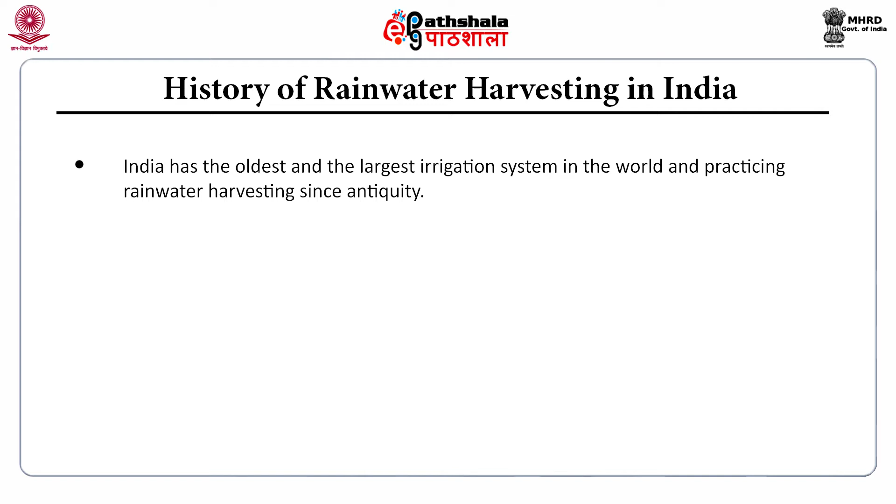Rainwater harvesting is not a new concept. Since antiquity, India has the oldest and largest irrigation system in the world and has a history of practicing rainwater harvesting. The oldest and largest known irrigation and rainwater harvesting system was created by Chola kings in Tamil Nadu.

People of Rajasthan have traditionally been practicing rainwater harvesting since ancient period. The Baoris and Jhalaras, also known as step wells, are the oldest rainwater harvesting systems and are widely used in different parts of Rajasthan, Gujarat, Karnataka, and Maharashtra as well.

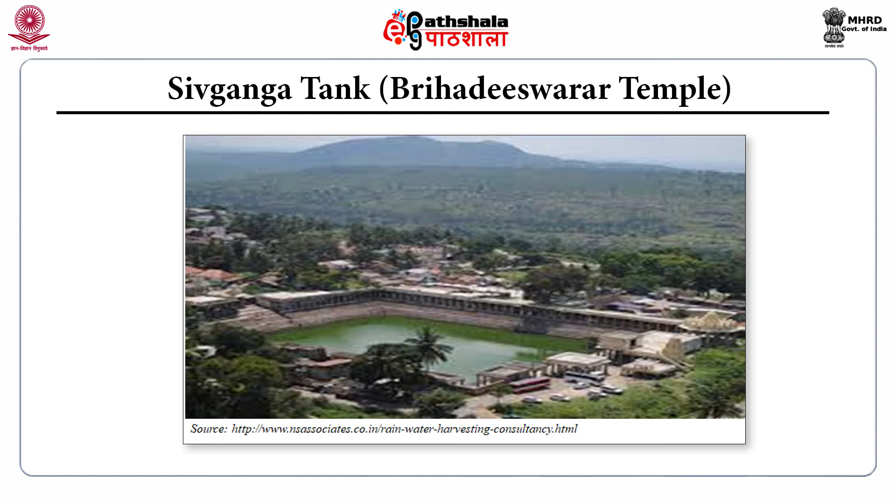In different parts of the country, different techniques are traditionally practiced, such as Sivganga tank or Brihadeeswarar temple tank, which collects rainwater used for the famous temple and also for irrigation activity at Thanjavur.

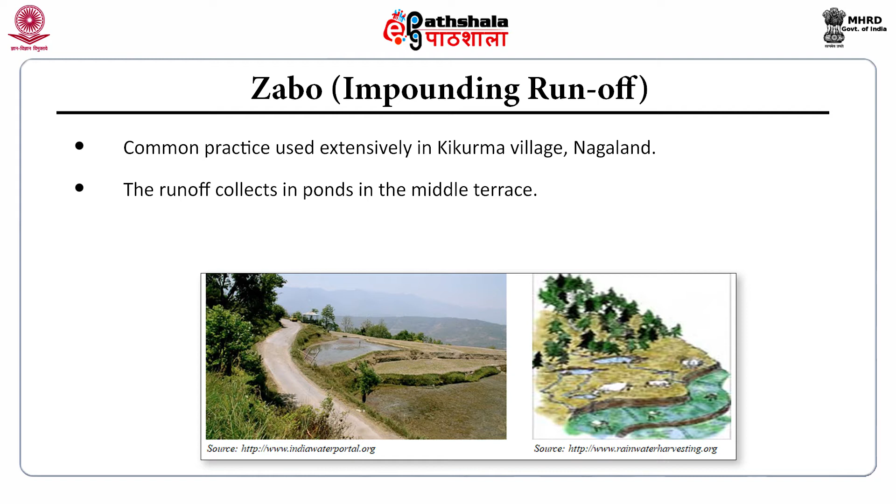The next technique among the traditional practices is Zabo, also known as impounding of rain runoff. It is a common practice used extensively in Kikurma village, Nagaland. The runoff collects in a pond at the middle terrace. This pond, called Zabo, receives rainwater and is used for paddy plantation and also for fish rearing. The bunds on the side of the ponds are used to grow herbs and medicinal plants. This way, the traditional farming system also helps in conserving the forest in the region.

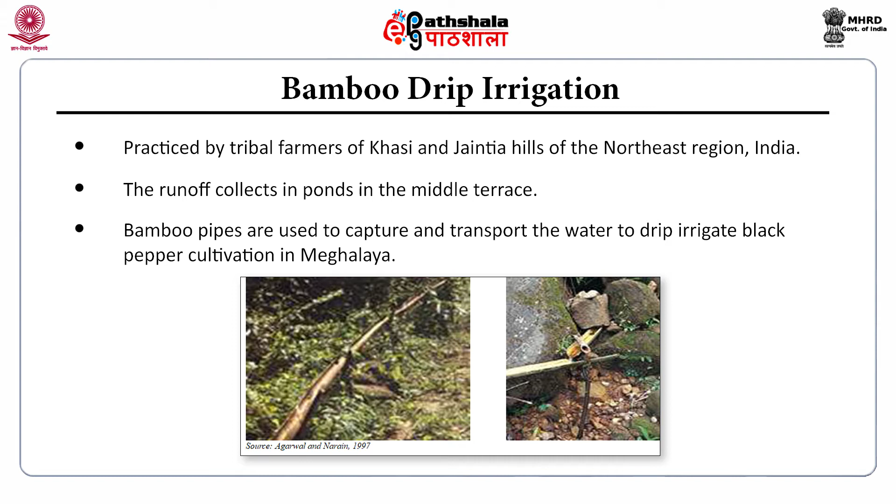Bamboo drip irrigation: bamboo pipes are used to capture and transport water to drip irrigate black pepper cultivation in Meghalaya. Many bamboo pipes of varying diameter and length are laid to manipulate and control the flow of water.

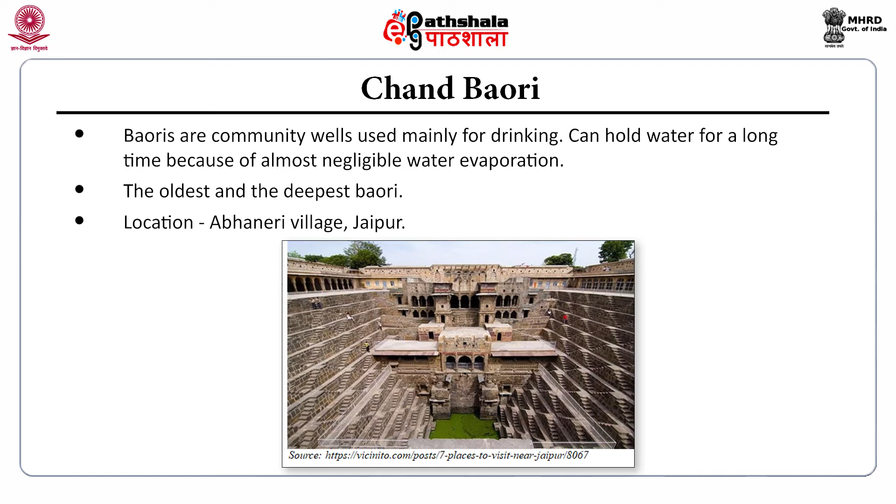Among all the other techniques, people in Rajasthan use a well-structured traditional practice also known as Baoris. These are community wells mainly used for drinking. They can hold water for a long time because of almost negligible water evaporation. The oldest and deepest known Baori is also known as Chand Baori, located in Abhaneri village, Jaipur.

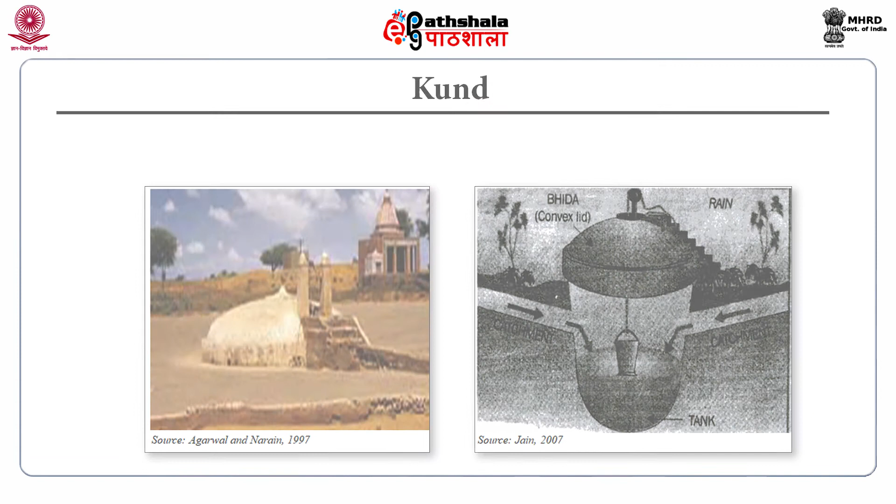Tankas are covered underground tanks developed primarily for tackling drinking water problems. Also, the kunds are well-structured and maintained underground storage tanks that collect rainwater through artificial catchment diverted to underground storage tank.

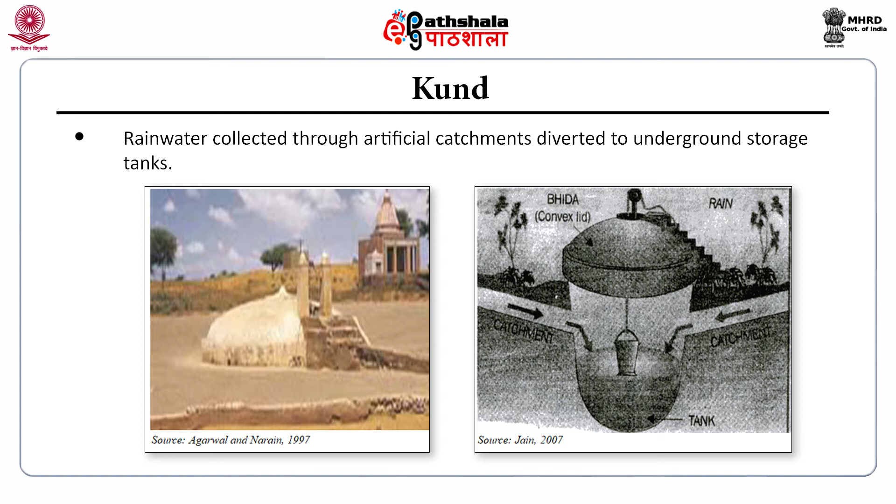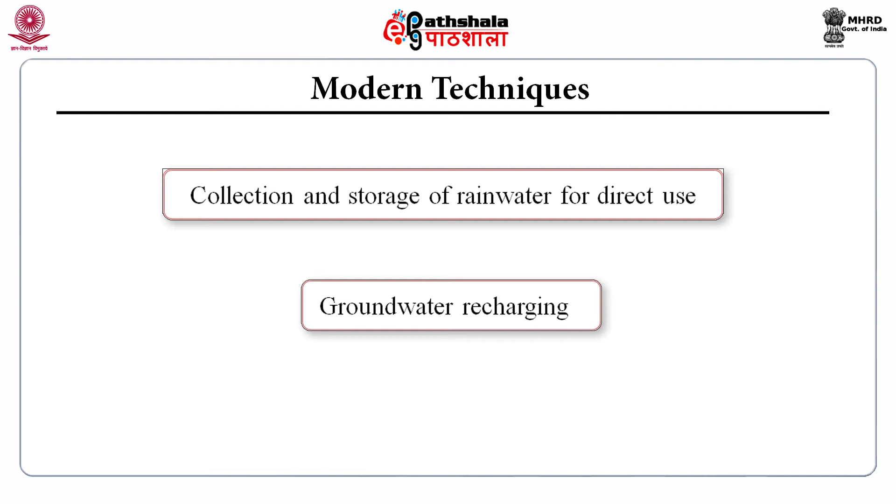Among the modern techniques for rainwater harvesting, these techniques are broadly designed to serve two main purposes: first, for the collection and storage of rainwater for direct use, and second, for groundwater recharge. However, these two can also be practiced in combination, where the collected rainwater is stored for direct use and the excess of it can be directed to the groundwater recharge system.

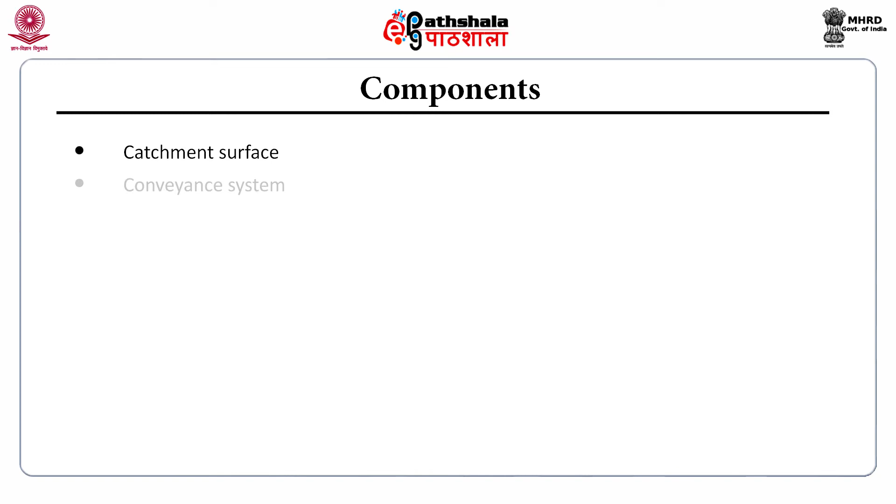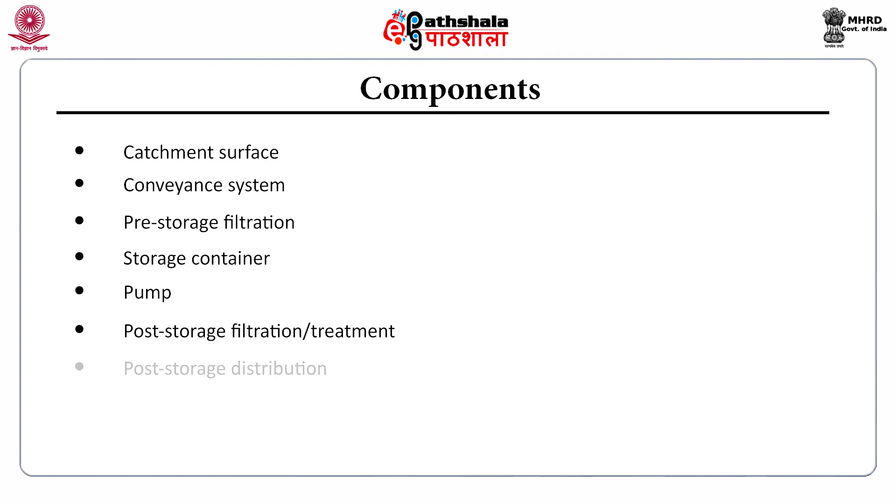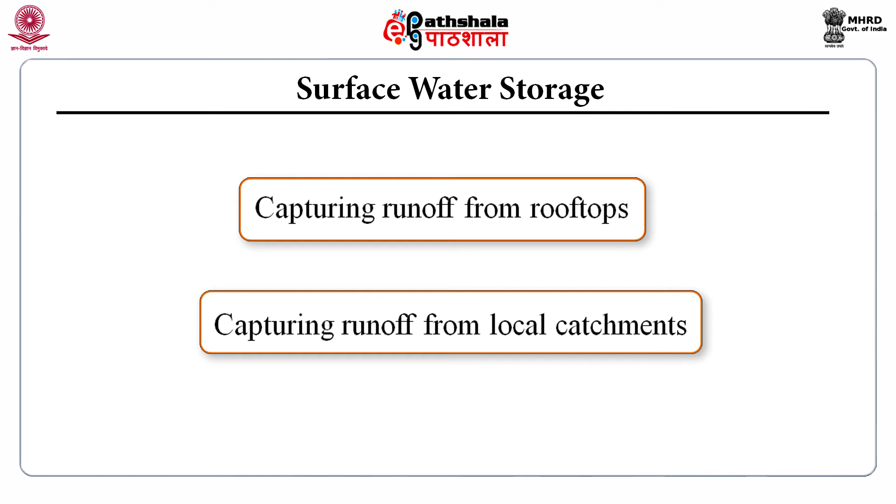A modern rainwater harvesting system comprises a combination of various components and processes. These are catchment surface, conveyance system, pre-storage filtration, storage container, pumps, post-storage filtration and treatment, and post-storage distribution. However, the system is not limited to these components only. The requirement of different components varies depending upon the harvested rainwater utilization. For surface water storage, it includes the capturing of runoff from rooftop and from local catchment. The most common example of surface water storage is rooftop rainwater harvesting system.

A rooftop rainwater harvesting system requires catchment, which is the collection area that directly receives the rainfall and provides water to the system. Next is coarse mesh.

Coarse mesh is provided at the roof to prevent the entry of debris. Then gutters, which are channels installed all around the edges of the sloped roof to collect the water. These are semicircular and rectangular shaped drains.

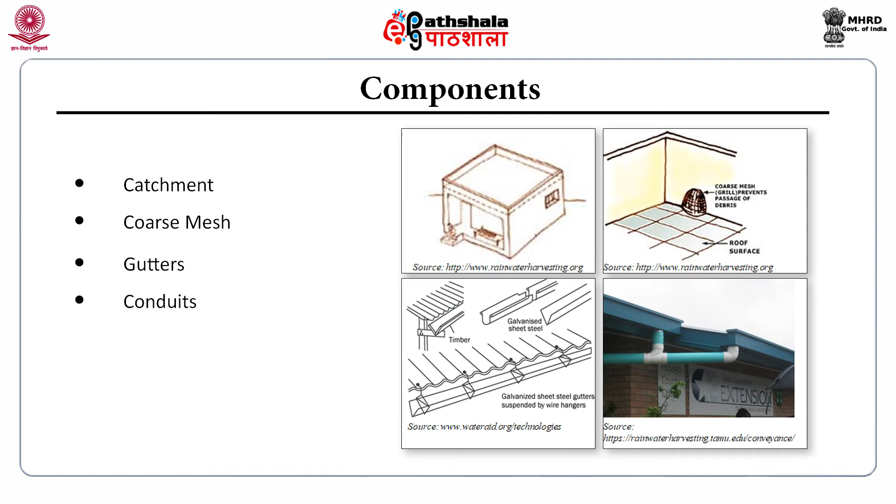Conduits are the pipes used to deliver the rainwater to the storage system. First flushing refers to the first few minutes of rainfall, called first flush, as it carries the heavy load of pollutants collected from the atmosphere and the catchment.

First flushing is a valve devised to check the entry of runoff from the first spell or flush of rain into the system. Next we have the filters.

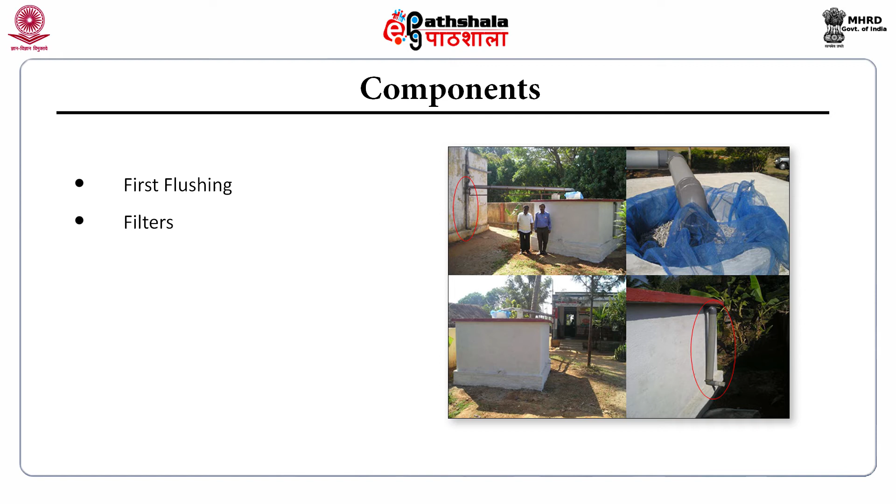A filter system is a chamber filled with fibers, coarse sand, gravels and charcoals, etc., to remove any debris or dirt particles from the harvested water before it enters the storage tank. These filters can efficiently remove any color, silt, clay and microorganisms from the water.

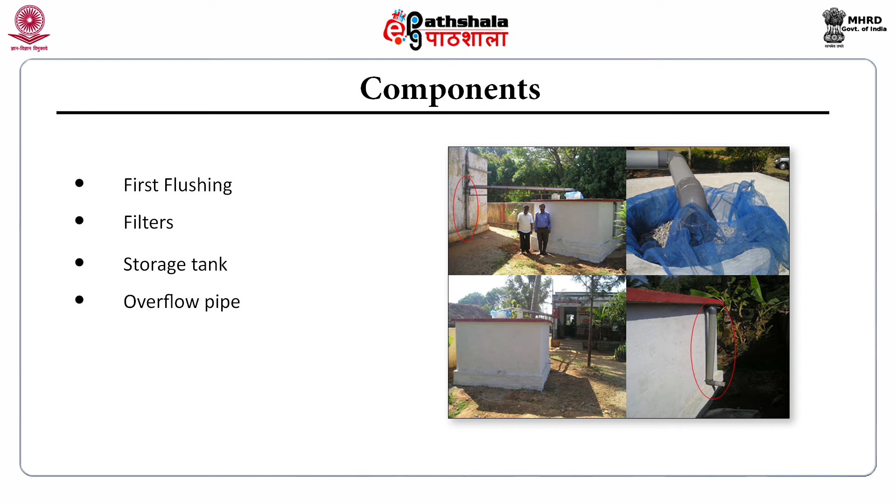Storage tank is a tank to store the water. An overflow pipe is installed on top of the storage tank to remove excess water from the tank during heavy rainfall. We can have a look at the schematic representation of the above ground rainwater harvesting system.

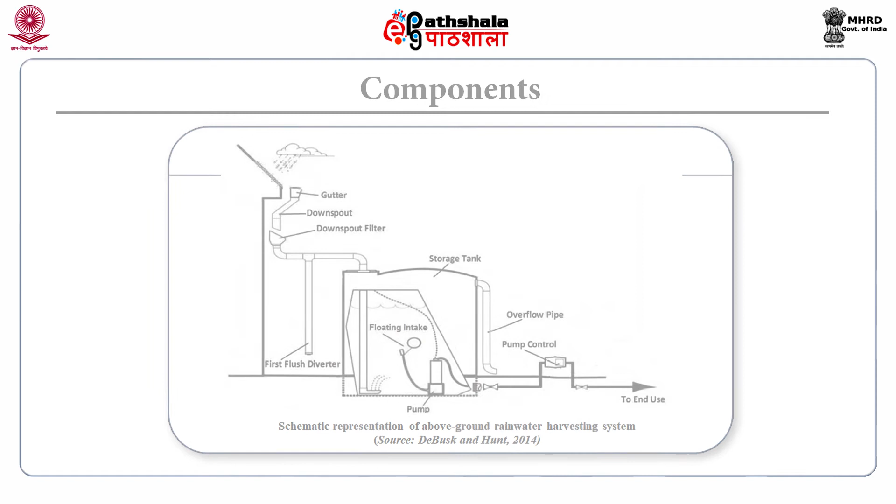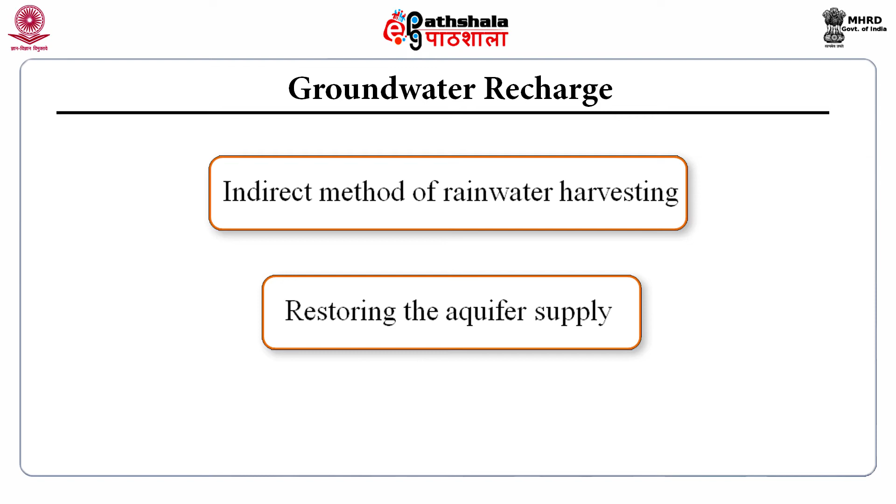For groundwater recharging, which is an indirect method of rainwater harvesting, the basic principle is to restore the aquifer. A groundwater recharge system involves the installation and construction of a variety of structures such as recharge pits and trenches.

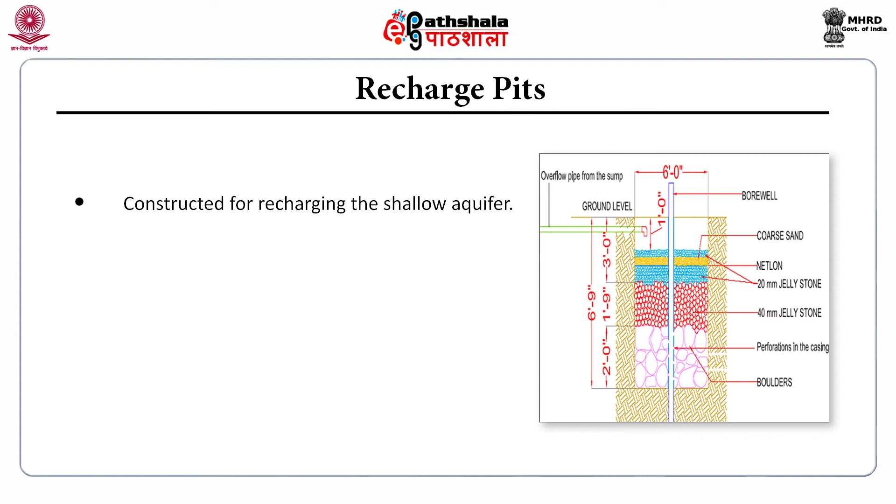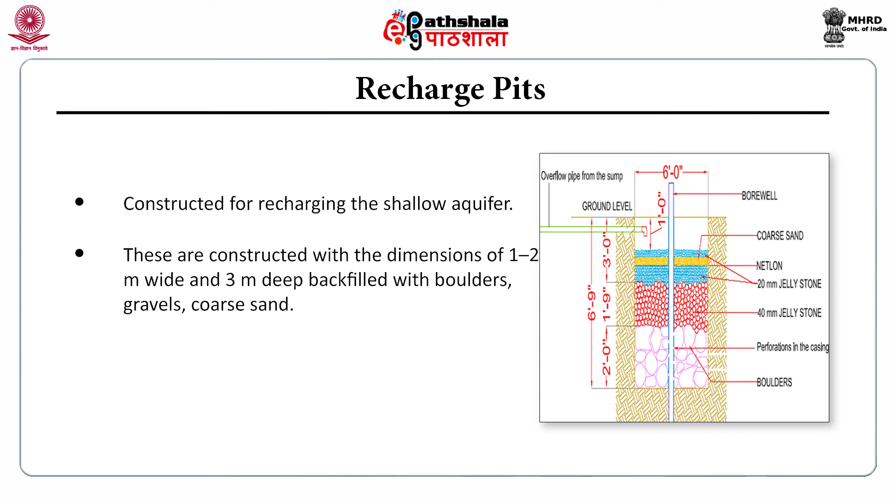Recharge pits are constructed for recharging the shallow aquifers. These are constructed with dimensions of 1 to 2 meters wide and 3 meters deep, backfilled with filter material, that is boulders, gravels and coarse sand.

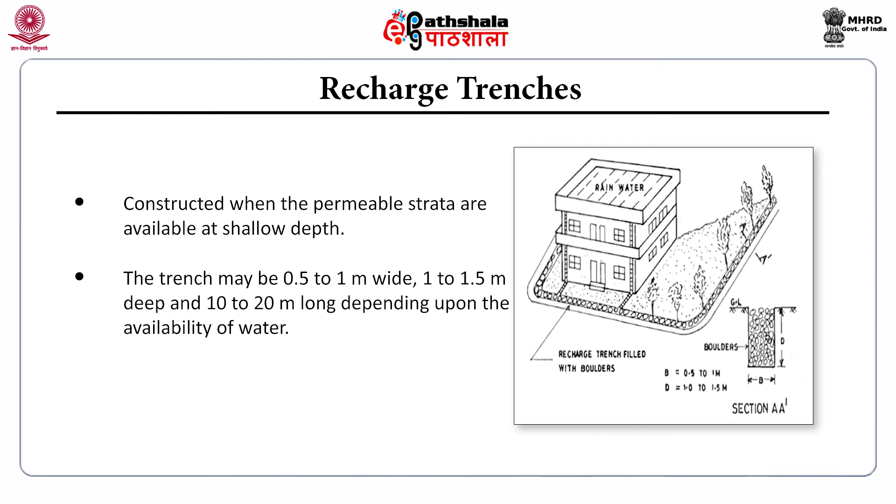Recharge trenches are constructed when permeable strata are available at shallow depth. The trench may be 0.5 to 1 meter wide, 1 to 1.5 meters deep, and 10 to 20 meters long, depending upon the availability of water.

Dug wells can also be used to recharge groundwater by utilizing existing dry, abandoned or unused dug wells. The water passes through filter media before being put into the dug well.

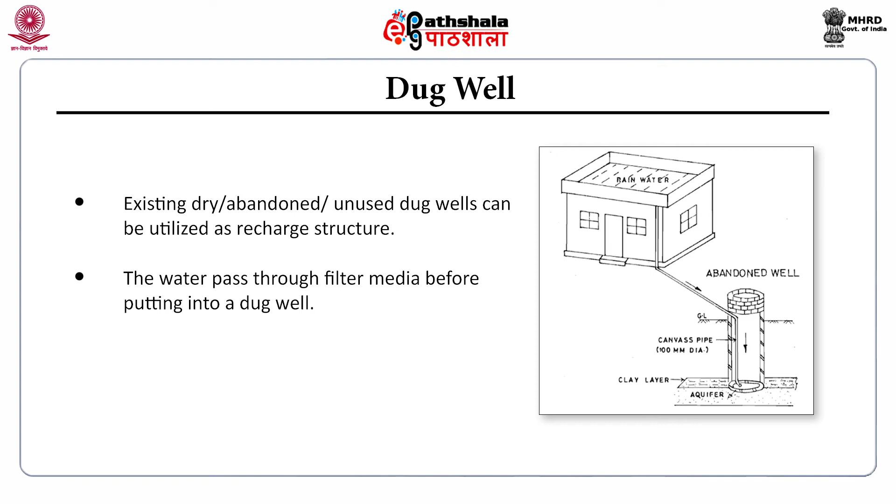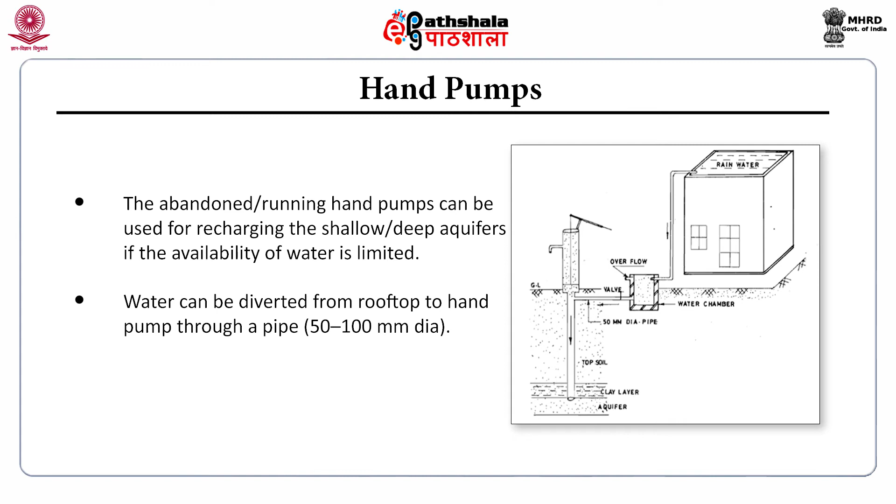Similarly, an abandoned or running hand pump can also be used for recharging the shallow or deep aquifer if the availability of water is limited. Water can be diverted from the rooftop to the hand pump through a pipe.

For any successful rainwater harvesting system, it is important to quantitatively estimate the harvested rainwater. But for quantitative estimation, certain parameters are required to know.

These include the rainwater endowment of an area, which is the total amount of rainwater received over an area, and can be calculated simply by multiplying the plot area and the rainfall height.

Next is rainwater harvesting potential. The amount of rainwater that can be effectively harvested is known as rainwater harvesting potential, which can be calculated by knowing the value of rainfall of the region, the area of the catchment, and the runoff coefficient.

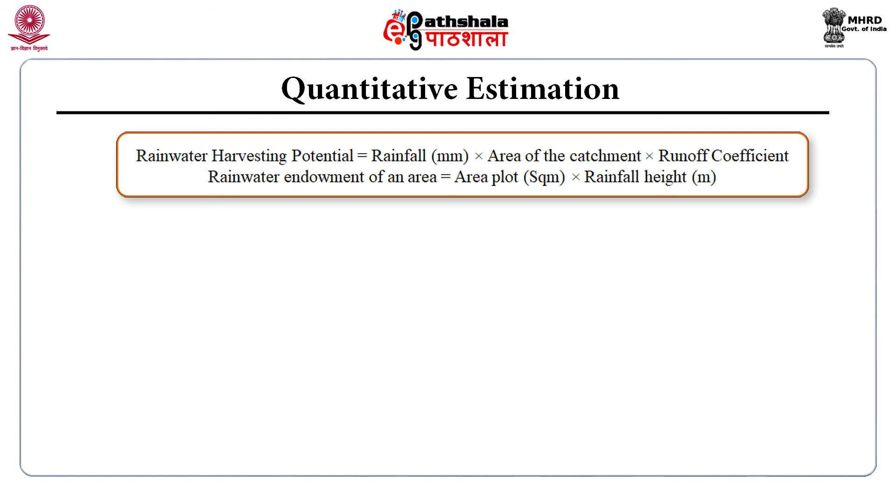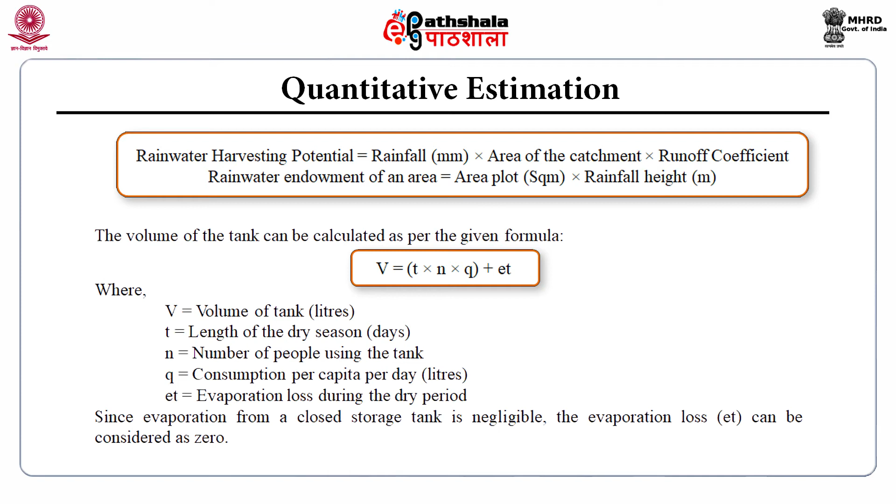Next important parameter is the volume of the storage tank, which is the capacity of a tank to hold water. A rainwater harvesting system must be designed to fulfill the water requirement of users during the dry period. Therefore, the volume of a tank can be calculated as per the given formula.

We have seen that for calculating the rainwater harvesting potential of a storage tank or of a catchment area, the runoff coefficient is important. So runoff coefficient is a value representing the total amount of water that our catchment area can hold.

A surface can lose the collected rainfall due to spillage, leakage, evaporation and many other means. Therefore, runoff coefficient is the value that represents the ratio of runoff to rainfall, and it gives a value of the maximum amount of rainfall that a surface can hold.

For example, if a surface has a runoff coefficient of 0.9, it means that the surface can hold 90% of the rainfall. Because the runoff coefficient of an area depends upon the topography, catchment structure, slopes, soil and various other parameters of the region, its value varies.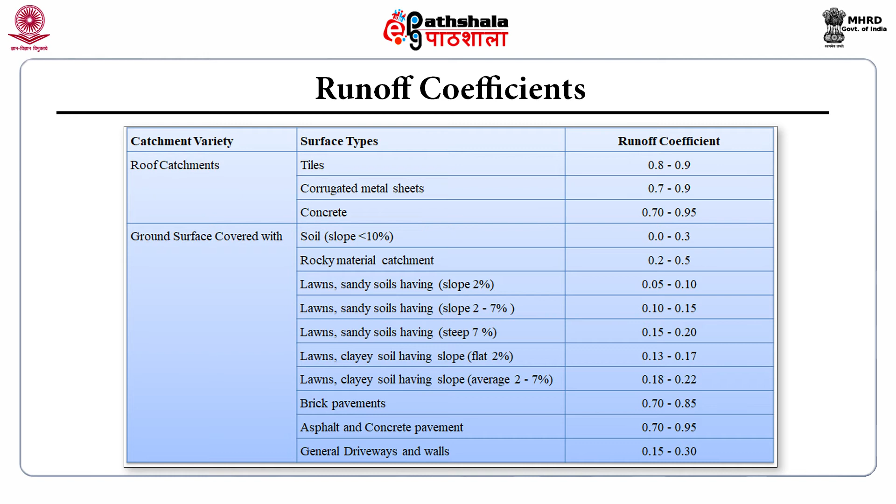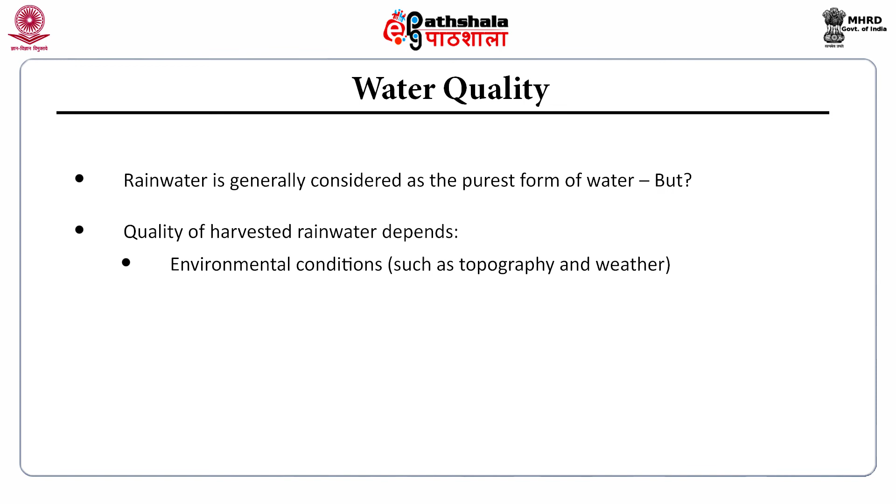Rainwater is generally considered the purest form of water, but the quality of water harvested through a rainwater harvesting system depends upon environmental conditions such as topography and weather, and also upon the material used in the construction of the system.

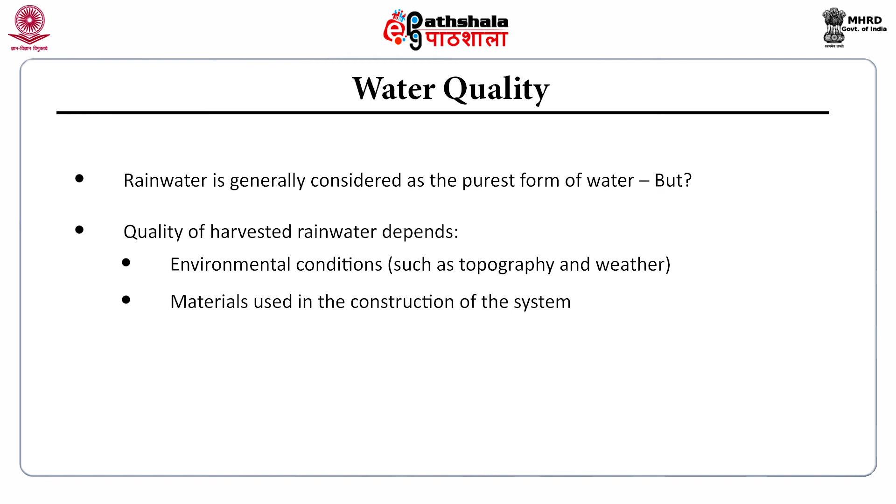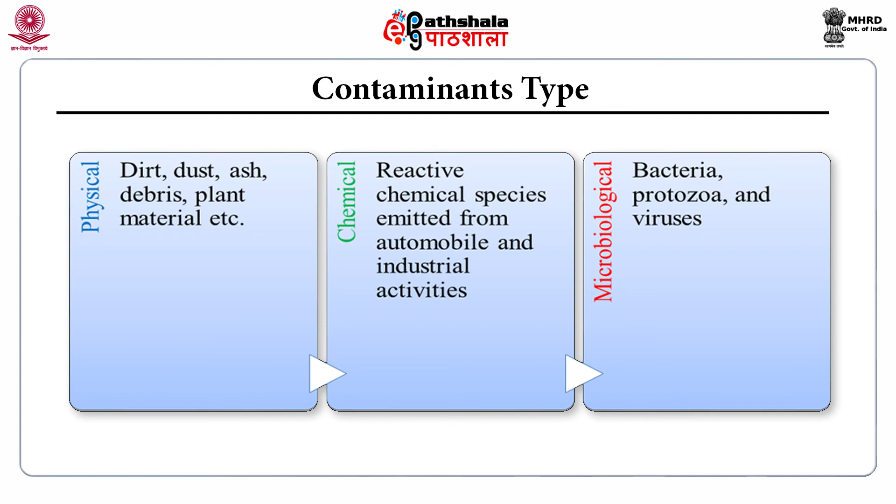Different contaminants of a rainwater harvesting system broadly fall into three categories: physical, chemical and microbiological. Physical contaminants include dirt, dust, ashes, debris and plant material. Chemical contaminants include reactive chemical species emitted from automobiles and industrial activities. Microbiological contaminants consist of bacteria, protozoa and viruses.

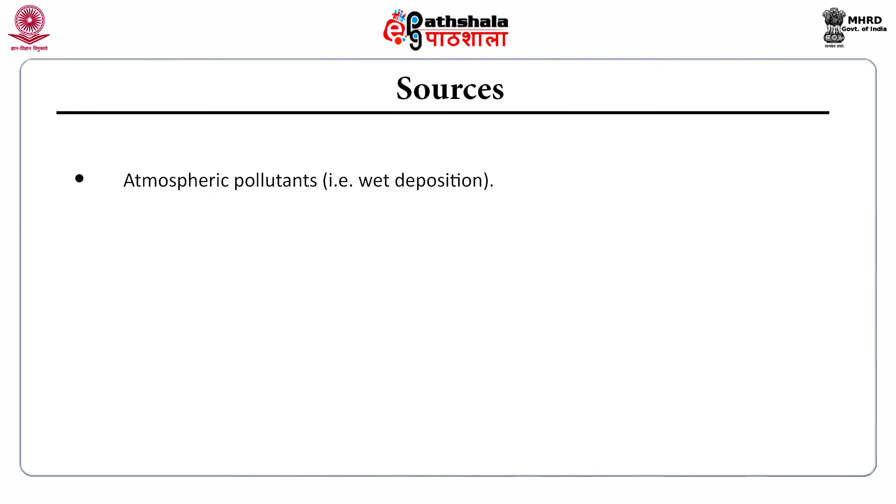These contaminants can come from various sources, such as atmospheric pollutants, also known as wet deposition, where rainwater coming in contact with the atmospheric layer collects certain pollutants. Atmospheric deposition accumulated on the roof surface is known as dry deposition, occurring when rainwater comes in contact with the roof materials used in construction.

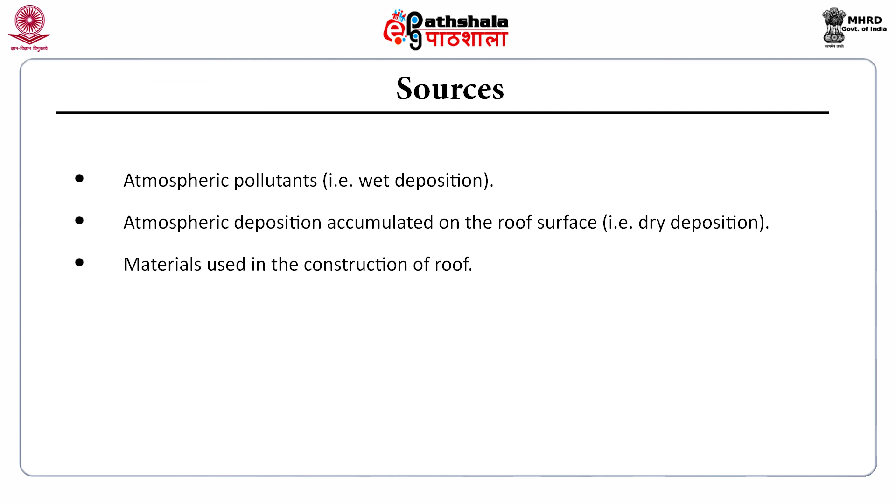Improper maintenance of a rainwater harvesting unit can affect water quality and pollute it with different contaminants. Therefore, proper maintenance of the rainwater harvesting system is essential. Proper functioning and maintenance of harvested water quality can be achieved through several measures.

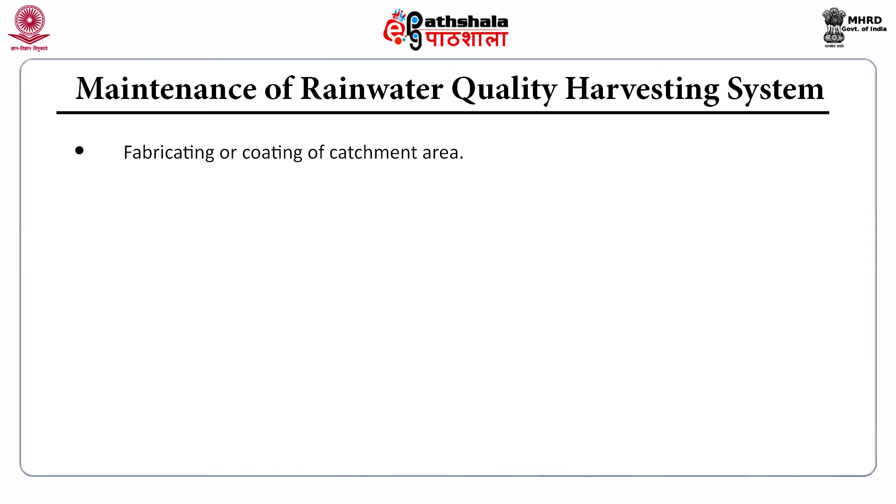These measures include fabricating or coating the catchment area, smoothing the surface of the catchment area, avoiding materials prone to leaching such as zinc and copper in the roofing system, covering all inlets or mouths of drain pipes with nylon or wire mesh, and avoiding exposure of stored water in the storage tank to sunlight, as sunlight can promote algal growth.

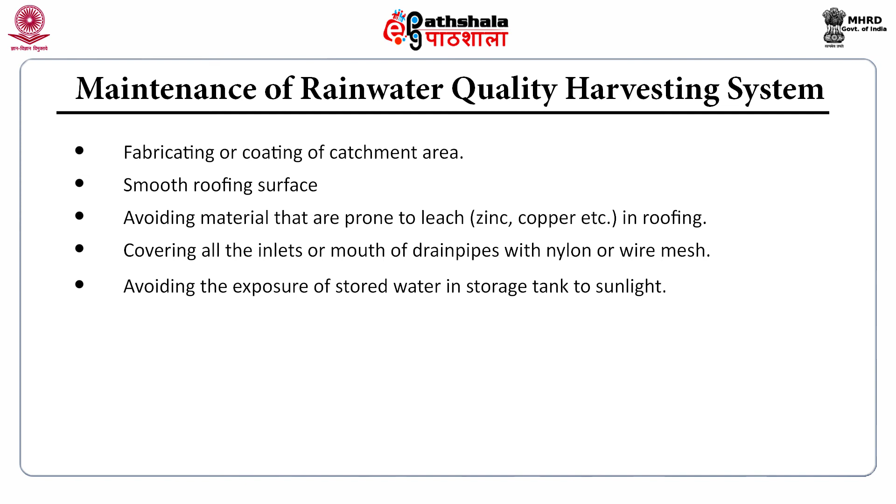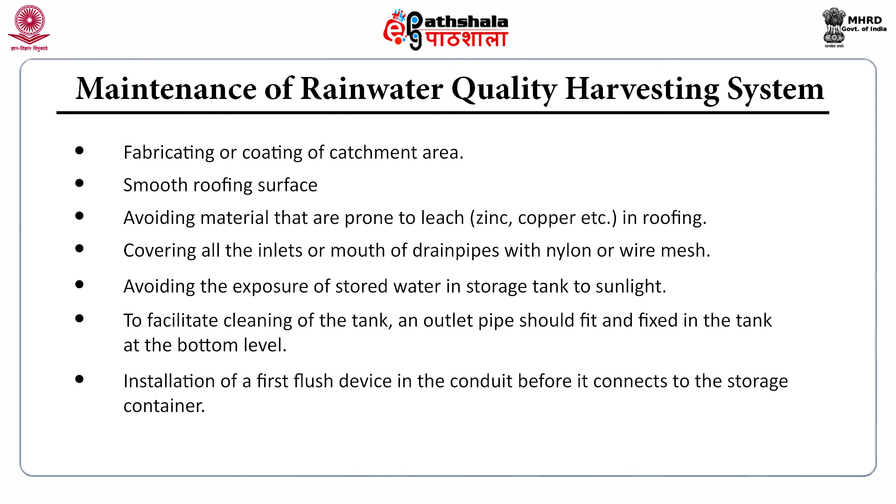To facilitate cleaning of the tank, an outlet pipe should be fit and fixed at the bottom level of the tank. A first flush device should also be installed in the conduit before it connects to the storage container.

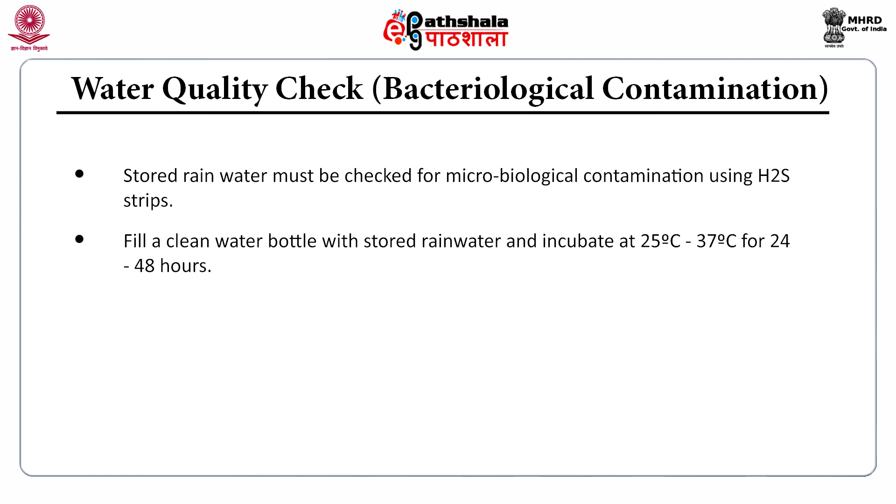To avoid bacterial contamination, stored rainwater must be checked for microbiological contamination using hydrogen sulfide strips. For this, a clean water bottle should be filled and incubated at 25 to 37 degrees centigrade for 24 to 48 hours.

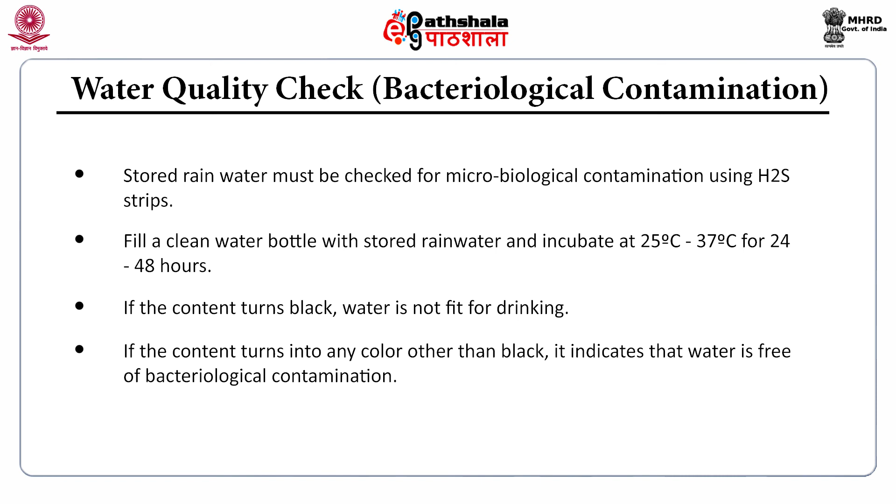If the content turns black, the water is not fit for drinking. If the content turns any color other than black, it indicates the water is free of bacteriological contamination.

Proper treatment and maintenance of hygienic conditions should be done to avoid development of any pathogen in stored water. Stored water treatment includes chlorination, boiling, and sunlight disinfection.

For chlorination, calcium hypochlorite can be used at the rate of 1 gram per 200 liters of stored water to disinfect it. Alternatively, chlorine tablets can be added at the rate of one 0.5 gram tablet per 20 liters of water.

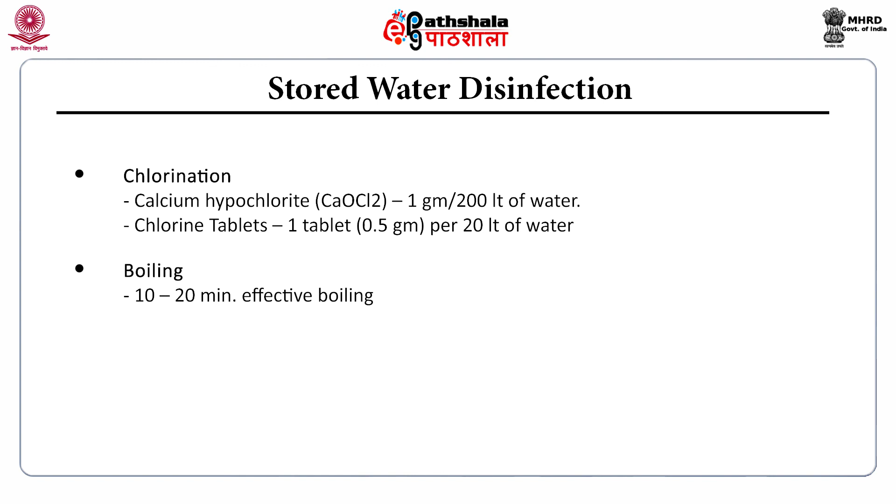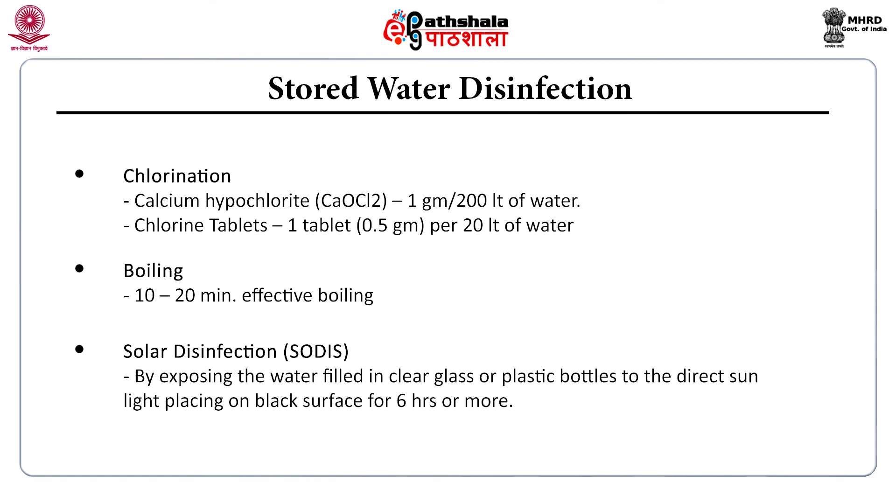Effective boiling for 10 to 20 minutes can also be used to disinfect water before drinking. Solar disinfection, also known as SODIS, can be done by exposing water filled in a clear glass or plastic bottle to direct sunlight, placing it on a black surface for 6 hours or more.

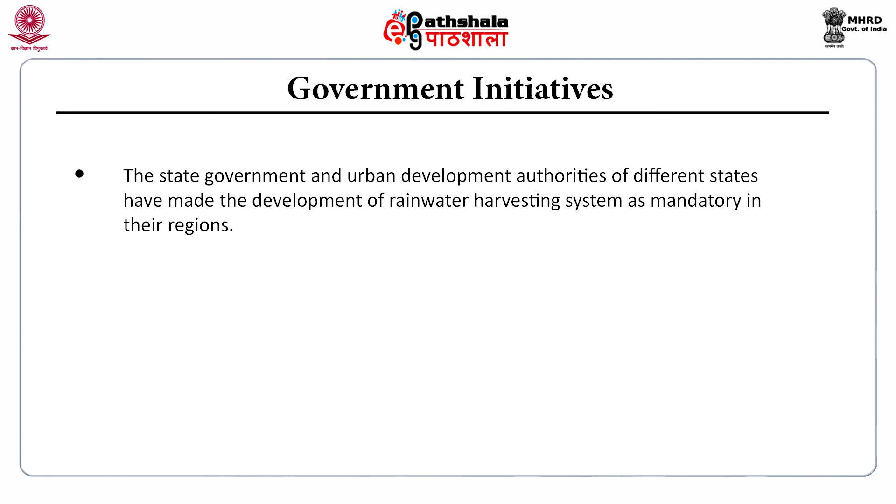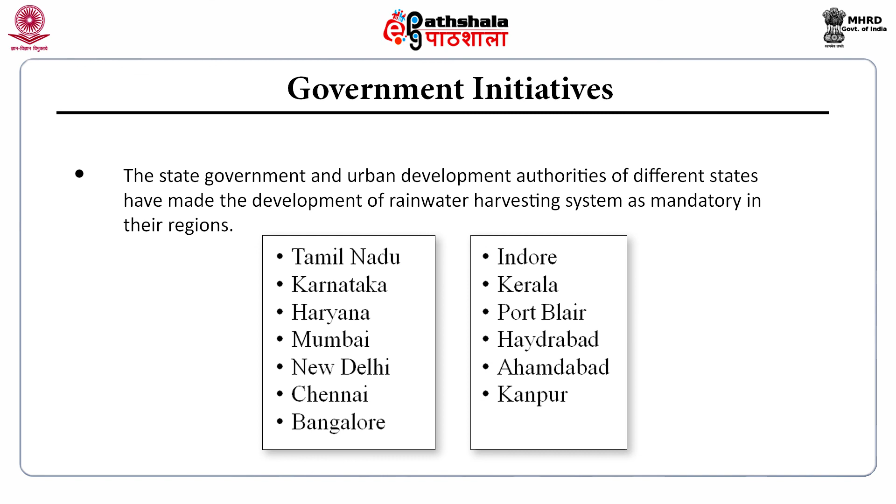The Government of India is promoting the conservation of water. National and state water policies have recognized the role of rainwater harvesting in maintaining national water security. As a result, state governments and urban development authorities of different states have made the development of rainwater harvesting systems mandatory in their regions. These are some examples of states that have made rainwater harvesting systems mandatory.

Dear student, in this module we have discussed the importance of rainwater harvesting to secure water demand, and different types of rainwater harvesting systems, including traditional practices used in India since ancient times. Knowledge of these traditional practices is important to develop modern rainwater harvesting systems.

We have also learned the quantitative estimation of rainwater harvesting systems and the maintenance of water quality in rainwater harvesting systems, to avoid serious health issues associated with consumption of contaminated water, and to ensure proper working of the rainwater harvesting unit in the long run.